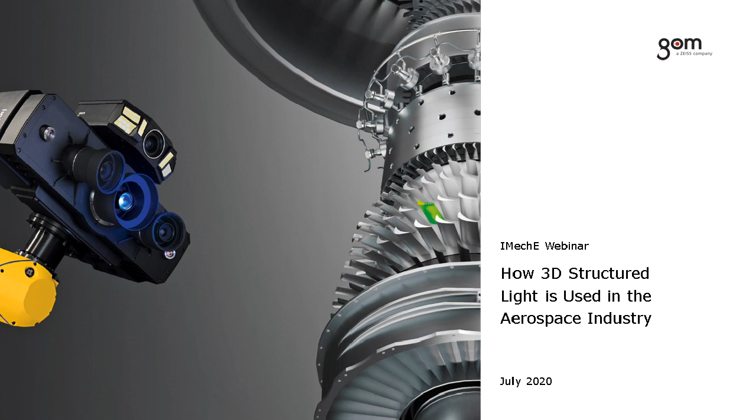So today I want to present to you how 3D structured light is used in the aerospace industry. So firstly, I'd like to introduce the presenters and also talk a little bit about who GOM are.

Okay. So, as an introduction, my name's Scott Cattell and I work for a company called GOM UK. So alongside working with GOM, I'm also a volunteer at the IMechE. So I'm education representative for the IMechE's Birmingham Young Members Panel. So my main duties include enthusing young engineers to be a part of the IMechE by helping out with events, hosting online and face-to-face sessions as well.

So just as a quick introduction to each of us, so on the left, that's myself. So I'm applications development and support at GOM UK. I've got over 5 years working in metrology, and 3 of which have been at GOM. Next is Lee Griffiths, who's a colleague of mine.

So although Lee operates out of the UK, Lee's actually a global role developing the business for aerospace and power generation. So Lee spent the majority of his career at Rolls-Royce, working on the metrology, but also developing as an apprentice with the aerospace division. And then he's also been working at GOM for the same amount of time as myself.

And then on the right as well are a customer of GOM's, but they're actually a service provider. So they complete bureau work. So this is Dan Laitchbury, and he's engineering manager for Physical Digital. So Dan's also very experienced within metrology. He's a chartered engineer with the Institute of Measurement Control, and he's spent the majority of his working metrology career at Physical Digital.

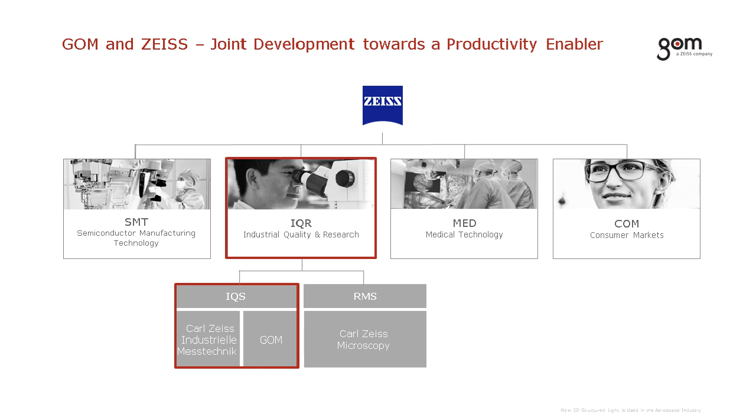So recently, roughly between a year and 18 months ago, we were acquired by Zeiss. So we've actually become part of the Zeiss group now, and from that we've become part of the industrial quality and research sector. So Zeiss are a humongous company, so they're most well known for producing camera lenses, so just general photography lenses, also the lenses in optical glasses as well.

So we've now actually combined portfolios with Zeiss. So this is basically to meet the demand of customer requirements. So within that, we've now got tactile, CT, and form and surface alongside dimensional metrology as well.

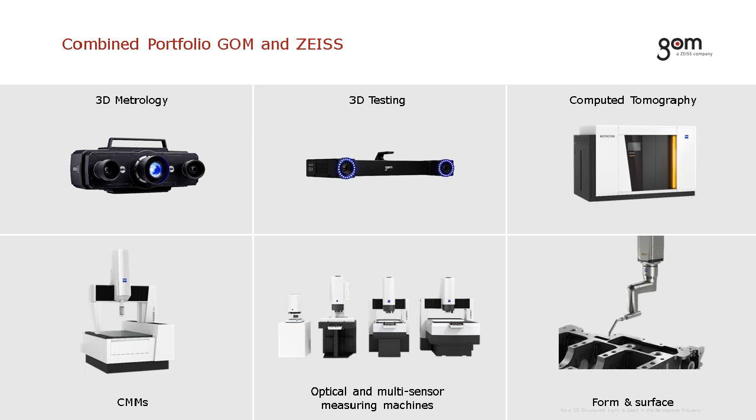So within GOM, I'm going to primarily focus today on the aerospace industry, but GOM as a company provides systems into many other sectors as well. So some of these include automotive industry, which is very large in Europe and Asia, consumer goods, which is predominantly in Asia, and then research in universities as well.

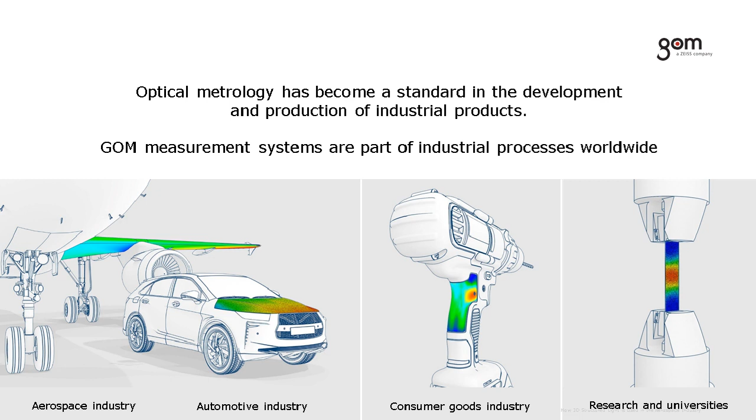So this is the other side of the business that we've got that tests materials. So we're always tracking 3D deformation, and this is what the research and universities are particularly interested in. Okay, so now we're going to actually talk a little bit about the technology and how it works.

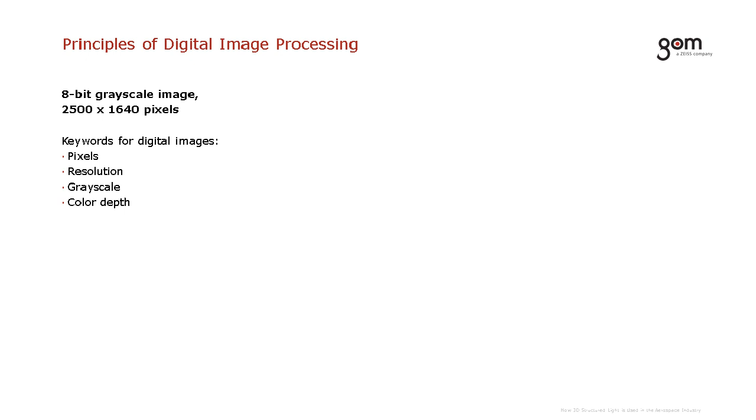Some of the keywords that we'll be talking about are on the screen now. So this is pixels, resolution, grayscale that we've just come into, and also color depth as well. So pixels may be fairly well known to some of you, but for others may be a slightly new topic. So we'll just go over these in some detail now. Okay, so we take these images in grayscale, and then we've also got a certain amount of pixels, or this is the resolution. So how many pixels have we got in this image?

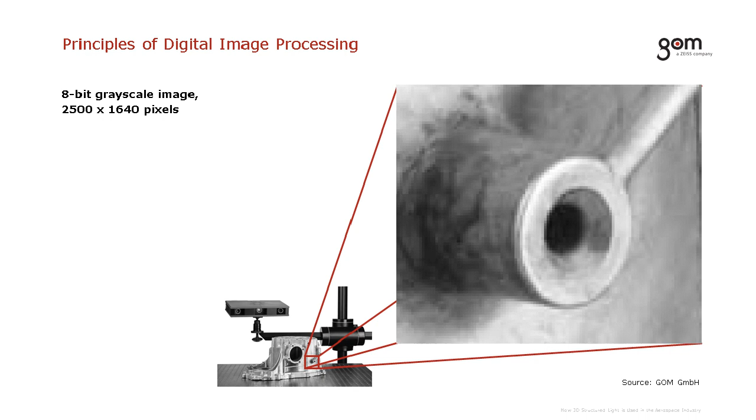So this is vital to actually extracting information from the part. So if we look at the blown up image here, we can actually see the individual pixels. A pixel is just a square. So images are made up of thousands, if not hundreds of thousands of these little pixels, and when we blow this up, you might be able to see that the blown up image on the right looks like it's consisting of a load of different squares. So when we go down to an even deeper level, what we've got are all these different squares in white and black and grey.

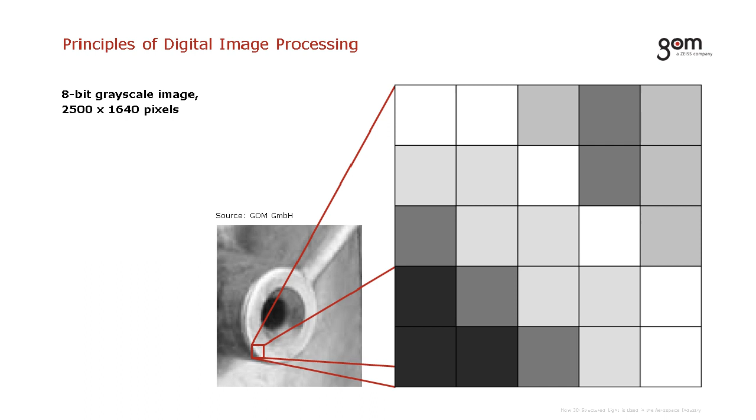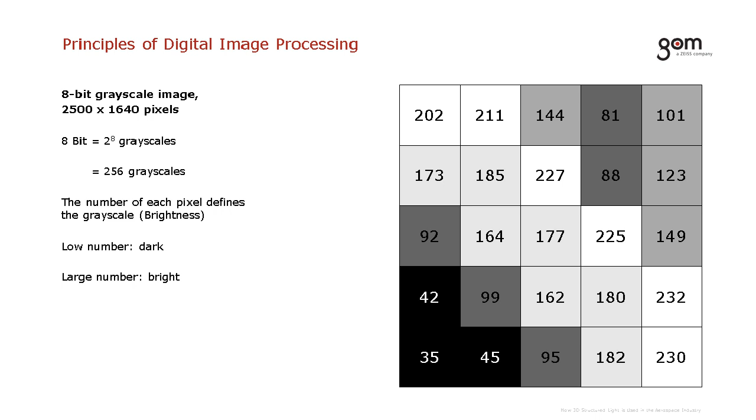So what do we do with this information when we first take the image? What we do here is actually assign numbers, 0 being the most dark and 255 being the most bright. So from this, we're able to understand where are the light areas and where are the dark areas. So why is this important to know? This is important primarily in our case to understand reference points.

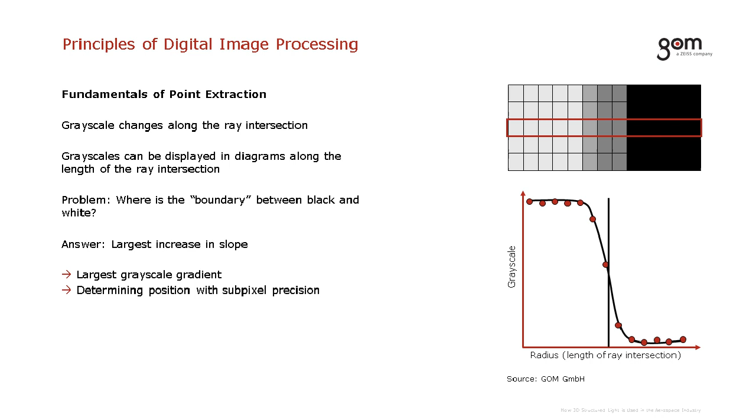Okay, so from this information here, we're able to then construct this over all these different rays. We can then form the ellipse, and from that, we then get the center point of that reference point. We do this with numerous amounts of reference points that are either on the part or on a fixture, and then from here we're able to triangulate the distances between the reference points, and then we can maneuver the sensor around it, and providing that we can see the reference points, we always know to a very, very accurate degree as to where we are in 3D space.

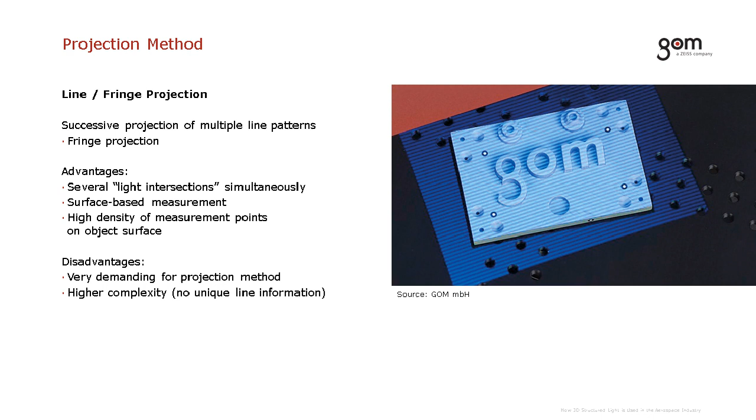So once we know where we are in 3D space, the next challenge is to actually scan the part. So how we do this is we shoot 3D structured light or a fringe projection onto the part. So this is where we differ. So there's two types of 3D scanners. We've got laser based, which will shoot lasers, and then we've also got 3D structured light. So structured light is actually shooting a known fringe projection onto a part.

So if we were to shoot this onto a flat surface, we would know exactly where we expect to see those fringes, as you can see moving on the screen now. And then based on whatever geometry is put in front of it, when we understand that the fringes are distorted in some way, the two cameras can actually go and pick up where the phase pattern is distorted, and then we're able to generate scan information from that.

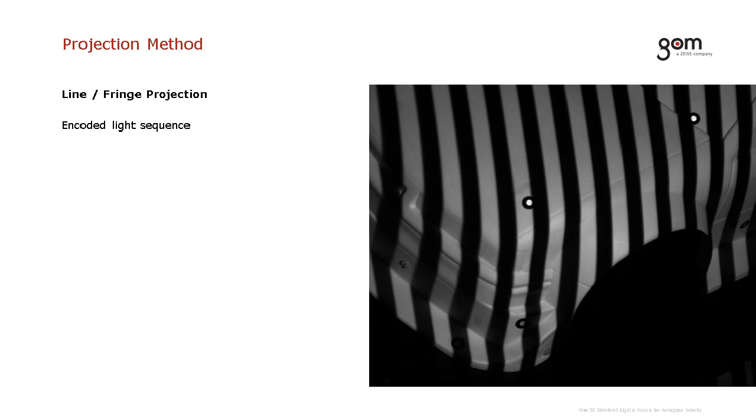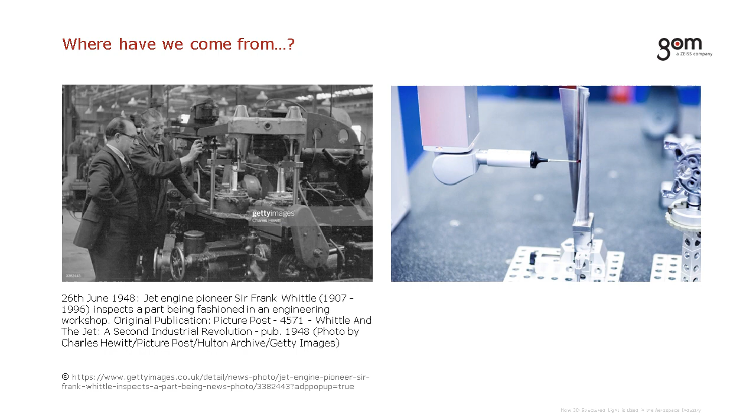And over the years, this has developed somewhat to be in more automated, coordinate-based techniques, much like you see on the right. So this is like a tactile method for identifying where the products are in 3D space, building this together and creating an inspection. What we found with the advent of CAD CAM systems, the more complexity that is being built into design, particularly freeform surfaces, things like additive, where really you're only limited by your imagination in terms of the design, is the need for a metrology system to support this, and that becomes the advent of a scanning system like our ATOS systems, which you see in front of you on the screen.

So this looping video shows one of our scanners, the black unit on the top, projecting the blue light as Scott's just described, being operated by a robot. So this is, let's say, equivalent to what you would do for a CMM. This is our level of automation. So the ATOS systems are some 20 years or more now in development, and we have quite a specialist team within GOM that do focus on aerospace. And building on the success of our previous generation sensors, we've launched a dedicated sensor for this industry. We've even named it appropriately, the ATOS 5 for airfoil.

So this is what you saw in the previous video. It's what you see on screen. And it's been designed and built specifically for this industry. We've optimized the setup, the lenses, the angles to suit geometries like turbine blades, nozzle guide vanes, blisks, and fan blades. So we've put all of our experience in over the years in order to meet the needs of the industry. So the needs are the resolution. So as the geometries get more challenging, the characteristics like edge sizes are getting smaller and smaller. The need to be quicker is also a big demand and a big challenge for the industry.

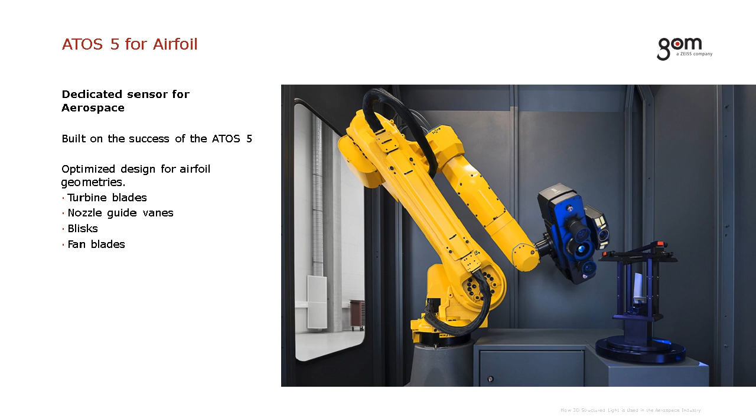So in terms of the capability, let's say, of this particular setup, you could measure something like an edge size of around 60 microns, and from a metrology point of view, use around 20 points to create that radius. Okay, in metrology terms, that's pretty good. So these are the reasons that the industry is moving more towards structured light. The data acquisition, the speed by which we gather data and we can measure and we can inspect is often extremely quick. And compared with traditional techniques, whether this is manual gauging or coordinate-based systems, these can be around half of the original time.

The other detail is really we're not limited by sectional data, which is quite a traditional way of inspecting. So sections are essentially taking a slice or a line through the part. You've essentially got a digital twin. It's a 3D replica in the virtual world of the product that you are measuring. So this gives no end of advantages that Daniel from Physical Digital will touch on in a second.

So these are the primary reasons that we use this technology, why we see it being taken more by the industry, because it becomes a tool that really starts to enable productivity, efficiency, and really moves towards this Industry 4.0 mentality.

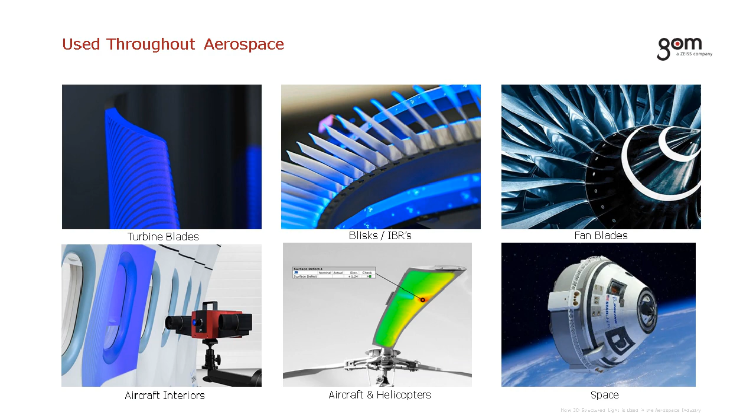Yes, thank you, Lee. Thank you, Scott, for the introduction. So, hello, my name is Daniel Aintreby. I work for Physical Digital. We're based in Guildford. I've worked with the GOM systems and other metrology systems for around about 9 years now, and we're actually the largest service provider in the UK offering GOM as a service, both operating mobile manual systems, and we also have a fully automated inspection cell with an ATOS 16 megapixel sensor.

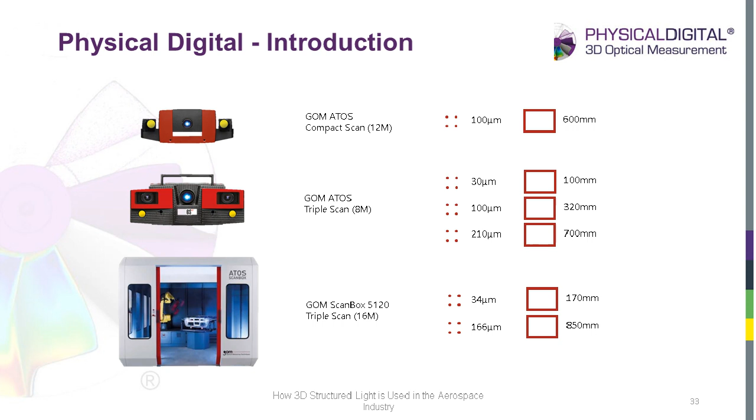We were the first company in the world last year to gain an accreditation called NADCAP AC7130, which enables us to carry out inspection of aerospace parts in the same way as a traditional CMM. We've also recently gone through an acquisition by a company called Trescal, who are one of the world's largest calibration companies. And I think this, coupled with the purchase of GOM by Zeiss, is a clear indication that the aerospace industry is going towards investing into optical scanning systems.

So I want to talk about a few applications that we've been involved in over the years. And first of all, kind of the range that you can get out of a GOM 3D scanner. So typical applications would range from 5 to 30 meters, we'd classify as a large object. And this can include full aircraft scanning for digital archiving, inspection, or reverse engineering of parts or full aircraft for CFD models or modifications.

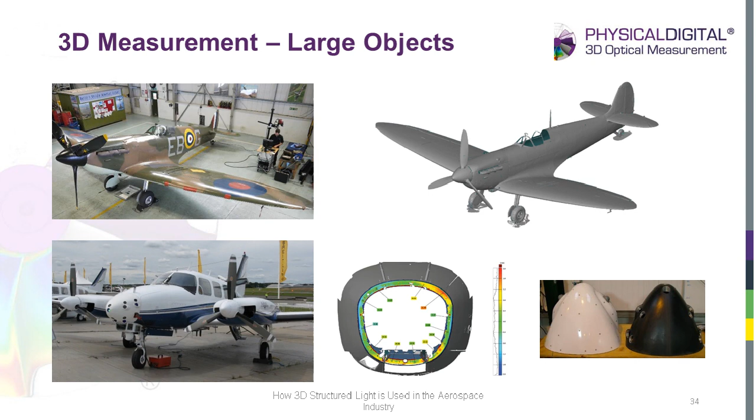And the reason the GOM system is particularly good for large objects is we have the ability to use it with the integrated photogrammetry system, which gives us a comparable global accuracy to a laser tracker network, but with the addition of having a huge number more reference points, either to take measurements to or to use for aligning scan data when used in combination with the 3D scanning system.

So we also do medium-sized objects that we would categorise between 1 and 5 meters, and this may include a rotor. So this particular example here is a 12-stage rotor that had over 800 blades, and these are all measured on a manual system. All shaft diameters were captured, and this took around about 6 hours. So you can see you can capture a huge amount of data, even using a manual system, in a very short time.

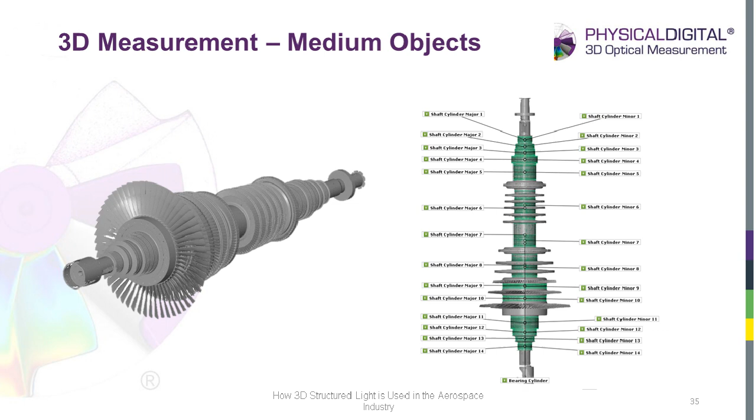But we don't just measure large and medium, and actually a lot of the real value can be seen in the small object size. So this is where we come on to the turbine blades and things. So I didn't want to show a trailing edge with no context or talk about resolution in microns. I wanted to give an example that everybody could relate to. So this is a fingerprint in a piece of clay that's scanned using a GOM system. And you can really appreciate the level of detail that you can capture in defining that surface fully.

So if anyone works on CMMs, I challenge you to get anywhere near that and calculate a time to measure that. The other thing is this is actually scanned on a system at 100 millimeters. The resolution can be increased by 3 times this if you get a specific system, especially for small parts.

So as Lee's already discussed, we obviously measure a range of parts, so typically blisks, discs, nozzles and blades, and the blisk would typically take around 2 hours to measure, full surface geometry, aerofoils and machine surfaces. Discs around 1 hour and 12 minutes, vanes around about 17 minutes, and then blades down to 7 minutes.

So I think the one thing to notice here, these are kind of average times, and also they are based on the system that we currently have set up. But since the release of the new Atos 5 sensor, these times would probably be halved. So it really does offer a production solution for measurement.

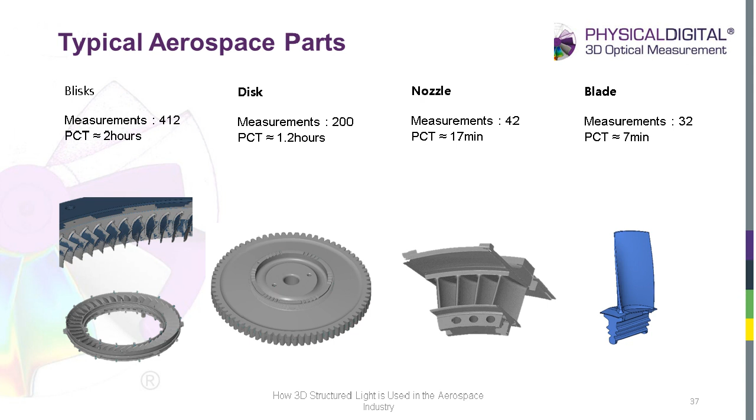So being a service provider, our measurement and inspection will fall into 2 main categories really. So we do low volume and high volume. The first being low volume, so this could be 1 part to 100, but tends to be one-off projects to help customers with measurement capacity or specific investigation to get areas that weren't necessarily captured on a standard CMM program.

So the advantage of the reference points, and again Scott has touched on this, is it enables us to have a direct link of traceability back to world standards because the scale bars can go and be calibrated in a DAkkS accredited lab. The photogrammetry system then is also used to cross-check calibration between the sensor, so from a process safety point of view, and also monitoring of environmental conditions such as lighting change. So it really does give a really stable system when used in combination with the scanner.

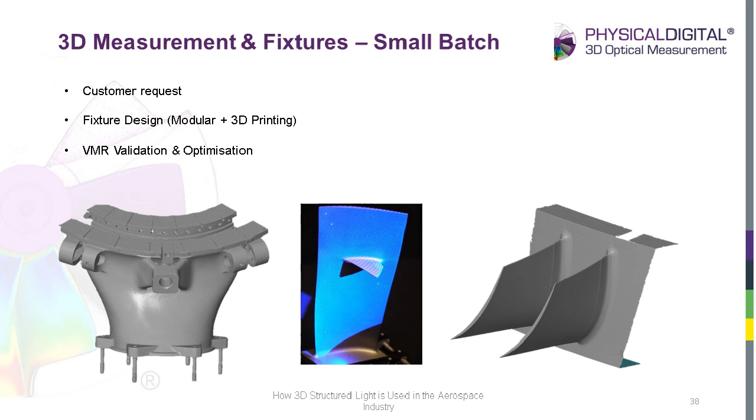The other advantage that we have from a small batch point of view is we have access to a virtual measuring room. So we're able to actually create all the measuring positions offline and have a digital twin of the robot before parts even arrive on site. So it's really a powerful tool for doing small projects and quick turnarounds. And then for these kind of projects, we would carry out some level of measurement system analysis, typically driven by the customer.

So the beauty of scanning is also we can capture the full surface of the object. And the image here on the top right just shows the range that we could typically achieve on a repeat study of a nozzle. So we're looking at around about 1 to 4 microns if we carry out a 10 dynamic repeatability study with reference points onto the part.

This project, from initial delivery from purchase order and customer parts to fixture design and manufacture, to create the programs, carry out the repeatability study and actually measure 30 customer parts, the total project length was 2 days. So you can see it's a really powerful tool for carrying out inspection work in a short time frame.

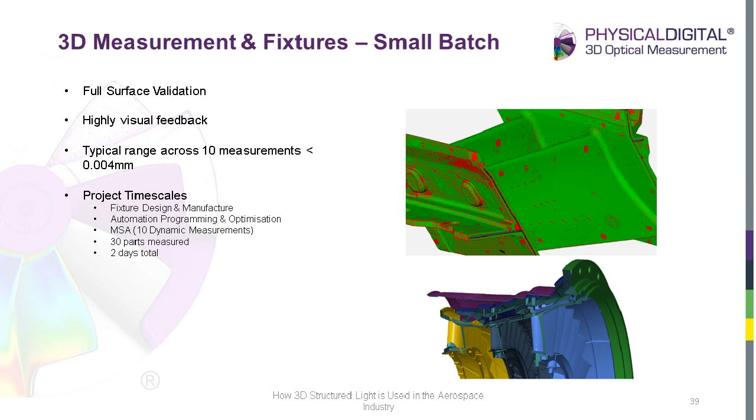On the color map, you can see there's red areas on the vane. So I just thought I'd point out here, these are actually the areas that exist under the reference points when they're applied to the surface. And obviously in production, it's not ideal to have to put points on, take them off, and risk having information under there that's incorrect. So that kind of leads us on to the second part of the measurement we complete, which is the higher batch sizes.

So where we're looking at sort of 100 plus parts, we would typically go down the route of optimizing the process to save time, and that may be with the specific one part fixturing, which you can see on the left and right, or if parts need scanning in batches or there is a large number, we can also create multi-part fixtures.

So the advantage of this is we obviously speed up the process of measurement. We have the ability to remove the reference points and place them externally to the object, so we're actually capturing the full surface, and to reuse photogrammetry measurements, so we're again saving time in the measurement cycle.

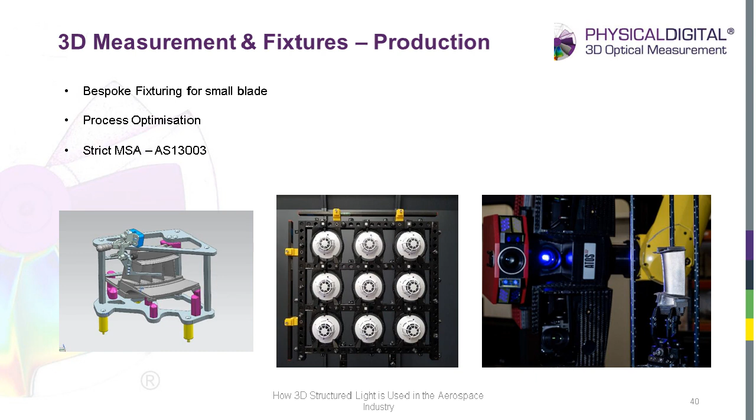So a typical example of a production measurement, so this is a single blade fixture. We would look at using a repeat photogrammetry, and then we can kind of put the time down for a small compressor blade for around about 2 minutes with a 10 times dynamic repeatability study of around about 3 microns. So compared to CMM, again, it depends what you're inspecting, but we're looking sort of 50 to 80% faster, plus the advantage of full surface deviation.

You can have the added benefit of full first article on every part if you wish. And then also the retrospective inspection of areas that weren't necessarily included in the original requirements. So no product recalls, no resetting up on the CMM to get that information. It already exists within the projects that you've captured.

So once you've captured all this great 3D data, what can you do with it? So first of all, we're looking at inspection. So we, as a company, have no direct affiliation to GOM, and we review competition in both hardware and software. But the reason we feel that GOM is so powerful is for a number of reasons. So we've got the ability to maintain full traceability from measurement to results.

So that goes from the calibration of the sensor, the artifacts, the scale bars back to world standards, the fully parametric link between the measurements and the results, which obviously is fundamental for aerospace, and just keeping that unbroken chain of custody, which you can't get if you then start extracting measurement data out of a capture program, importing it into a separate inspection program. You've lost that kind of direct parametric traceability.

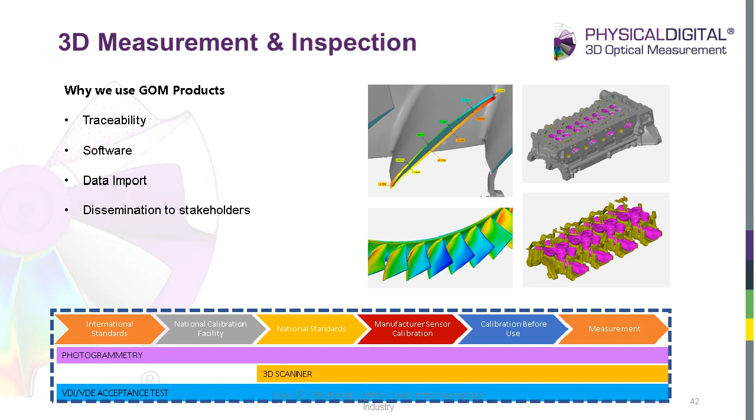So along with providing measurement and inspection, we also carry out a vast amount of reverse engineering. So I wanted to touch on a few tools where 3D data and the GOM software really help with the process of doing that. So to start with, I just want to quickly differentiate between two types of reverse engineering and where we differ, and where the aerospace industry differs as well.

So firstly, the example you see on the screen. So we've got a 3D scan of the part. We create a really nice CAD model. We show a color map deviation that's showing almost zero deviation. Maybe create some drawings, maybe create some model, maybe manufacture the part. So this is probably acceptable in some applications and looks great for marketing, but actually there's a few underlying questions that everyone should be asking if you see this or you're looking at doing reverse engineering.

So, is the part that was measured first correct? Obviously not, because it's been manufactured and it'll have some inbuilt variation. What's the history of the part? What about the interfacing parts? How is it manufactured? What's the measurement system accuracy and uncertainties? Has the CAD model been produced how the designer originally intended?

So there's a huge amount of questions that actually go into the background, and really creating a copy of what you've scanned is not truly reverse engineering in most instances. And if you don't see any deviations on the color map, then you probably should be asking questions about why not.

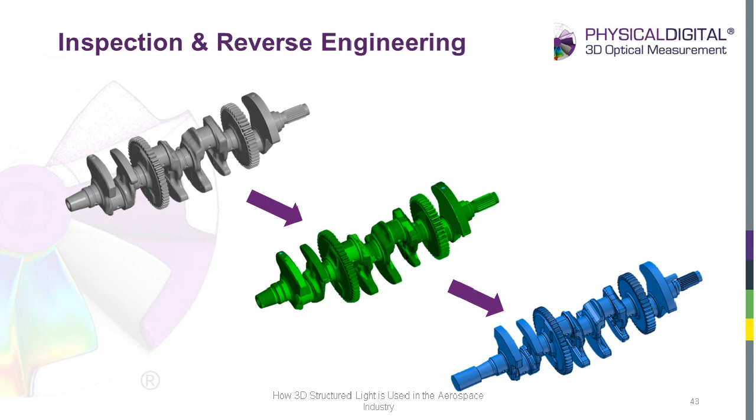So if you compare that to a CMM, if you're capturing 3 points or 10 or 20 or 50, yes, these are phenomenally accurate and probably sub-micron in a lot of applications, but is this better, and does it characterize the surface in the way that you actually want it? It also has major implications on functional requirements. So if you're applying maximum material conditions, how do you actually apply them if you're not capturing the maximum and minimum?

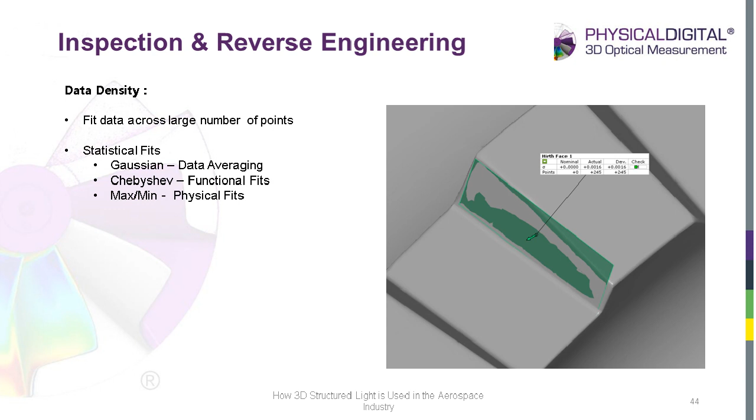So with the 3D scanning, obviously you're capturing a lot more data and characterizing the surface as best you can. So even at this feature level on a simple plane, the data gives a really good level of control because you can change the fits and you can take data out if it's deemed to be a piece of dust or dirt, and you can do that all retrospectively without having to remeasure the part, which other methods don't allow. So coming to the next slide.

So the other important thing, as well as data density, is looking at sample size. So this, I'd say, is the single most important aspect of precision reverse engineering. So when we undertake a project, we liaise with the customer to understand the level of risk acceptable in not correctly defining the geometry. So every part is going to have some manufacturing variability. What sample size do we need to capture to ensure that we've understood that variability, or at least minimize the risk as much as possible?

And this is where the batch or trend analysis comes in GOM. So it gives us the ability to carry out parametric inspection across a large number of the same parts in a fully traceable way, and also generate the sample statistics and identify potential outliers and anomalies. And also, if enough is known about the part, material, and manufacturing, we can also reverse engineer tolerances as well by using statistics and capability metrics to understand what's going on in that manufacturing process.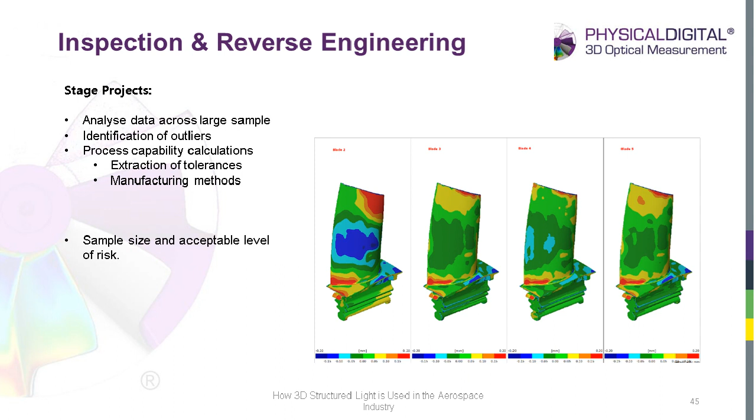All right. Sorry, I've skipped a slide there, apologies.

And then finally, from the tools within the software point of view, we have the aerofoil analysis, which Leah's touched upon. So a lot of the projects we undertake involve some reference to an aerofoil. And using the tools within the GOM software, which are standardized to aerospace companies, provides the key information for reverse engineering as well. So both 2D and 3D information can be generated and analyzed. And then from these, we can create driving dimensions for reverse engineering of models and parts.

GOM also provides the ability to have a golden mesh, which has a huge amount of uses. But in many applications, a good level of understanding of what that's actually showing you is required. It's not necessarily a tick box, an easy route to get the correct geometry out from a reverse engineering point of view.

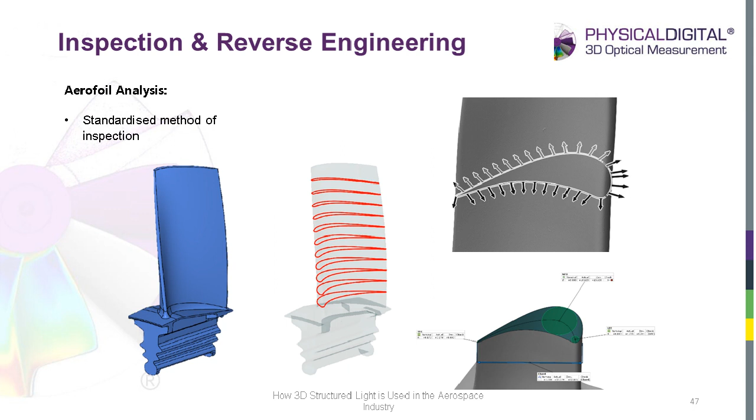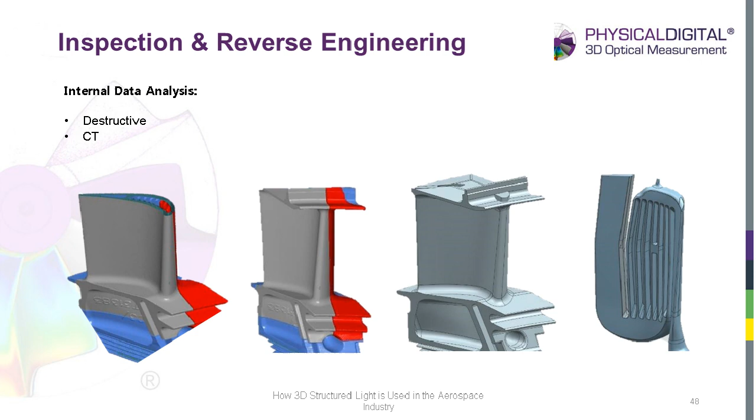And then some of the projects we undertake, we need to access internal data. So although GOM do now have a portfolio of CT scanners, it's still not usually suitable for measuring internals, especially on nickel-based alloys. So for this reason, destructive methods to extract the core geometry in this example are still used. So here we'd scan the outside of the blade. From that scan data, we'd create a fixture to hold the part while we carried out an EDM wire cutting process, and then the parts would be rescanned and realigned into the parent geometry to give us the core geometry in the same alignment as the external form.

So 3D, I want to just touch on some kind of developments and other things going forward now within the software and 3D scanning. So 3D CAD data and drawings should be unambiguous, but anyone who works in these on a daily basis will know that that's just not the case. So the designer, manufacturer, and inspector will all have slightly different interpretations of the design, dimensions, and tolerances, which will inevitably lead to variation in the part. And whether this is attributed to manufacture or inspection, it doesn't really matter. It's just this variation which is an issue.

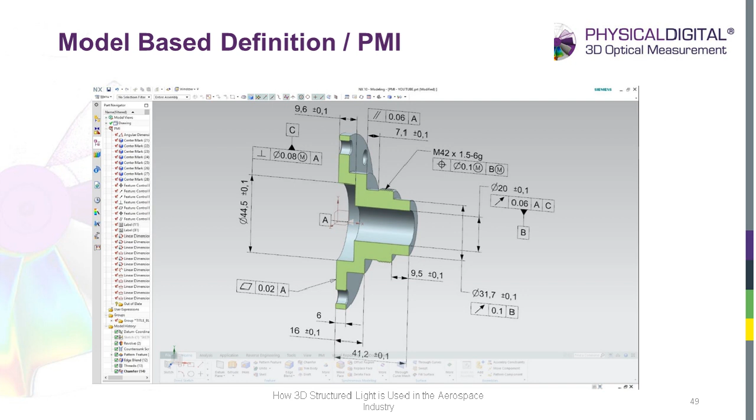So a development that goes some way in solving these problems is the use of product manufacturing information, or model-based definition, where we can directly attribute the dimensions and tolerances to the CAD data. So using the GOM software, this data can be read in directly and inspection plans created in an auto or semi-automated way, let's say. So this goes quite a long way in ensuring nominal values are correct and tolerances are correct, but actually is only half the story. So I think there's still a little way to go before there's a very easy way to translate measurement data in CAD into measurement data in the real world.

So if we take a really simple example here, like a linear dimension between two faces, there's at least 11 different ways to measure this, none of which are ever stated on a drawing and are always open to interpretation. So how do we communicate this on a drawing, and how do we communicate this within the model-based definition?

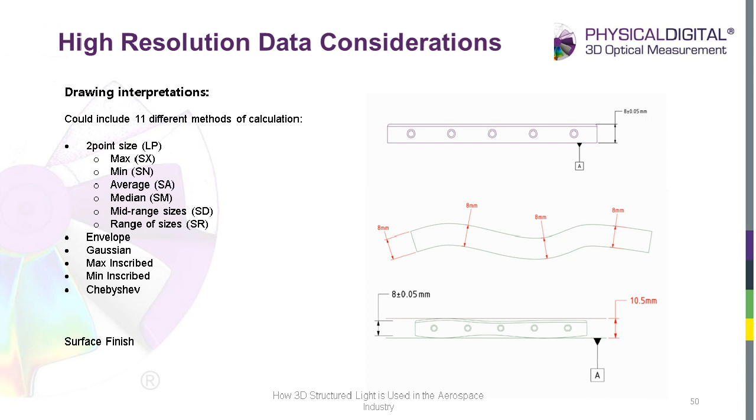The other thing to consider is the fact we have this high data density. So because the probability of detecting a true maximum or close to true maximum is more likely, then we tend to end up with results that maybe don't correlate with other systems, but are usually the upper end of tolerances, or often push parts out of tolerances compared to other systems.

So the ISO 14405 is making some progress. So you can see at the bottom right, we're looking at having some sort of statistical based measurements to kind of alleviate a bit of this. So if you see the image at the top, there's clearly some dust and dirt, which is factored into the calculations currently, but actually is probably not a consistent or correct way of doing it. So it's developing, but it's just being aware that when you're correlating between systems, you have to compare like for like, and there is variation that exists between these.

And then finally, for myself, it's just looking at what potential could happen in the future. From an aero engine point of view, because the speed of capture is so fast, is there potential for scanning everything and then using live CFD models to actually kit parts, so we're getting optimum performance of every part, or at least modules, which isn't unforeseeable. And also looking at full airframes.

So as the sensors and technology advance, is it possible to scan them during manufacture and deliver, for instance, customer-based delivery models, or during the MRO process, looking at dent and buckle reports in an automated way, or repair verifications, or even every time it lands. Who knows? If the scanning technology is developing as fast as it is, then it may even be feasible to scan every aircraft at certain hubs and have a complete history of the airframe movement over time, looking at deformation or hard landings or bird strikes. So these are a few possibilities and examples, but I'm sure the industry will find its own way.

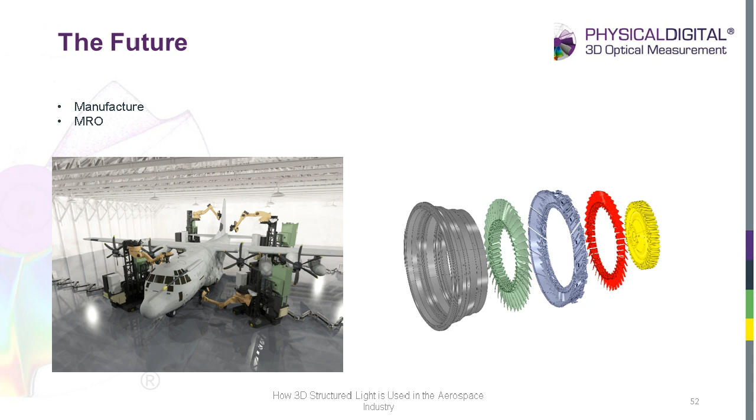Really appreciate that. It's a great overview of some of the real and practical examples, from reverse engineering through to production measurement and so on.

Thanks very much. So, the topic of standards. It's an extremely highly regulated industry, the aerospace industry, perhaps as regulated as any out there, and there are various standards and accreditations to meet, and I've seen a few items on the chat that relate to these questions. So first and foremost, like any measurement system, our systems leave the factory with a certificate. This is in line with VDI/VDE standards, and also now we have the 10360-8 as a test that you can do on our automated systems.

But what I really wanted to address, I get asked this so many times as I visit potential customers, is: can we use 3D scanning for final inspection?

Are companies using it for final inspection? Well, yes, there's nothing out there that prohibits the use of this. And it's quite often a common misunderstanding of the technology. So what I wanted to do is just give you a couple of examples about how we fit with the most common standards. And the most relevant, I guess, in the first instance is AS9102.

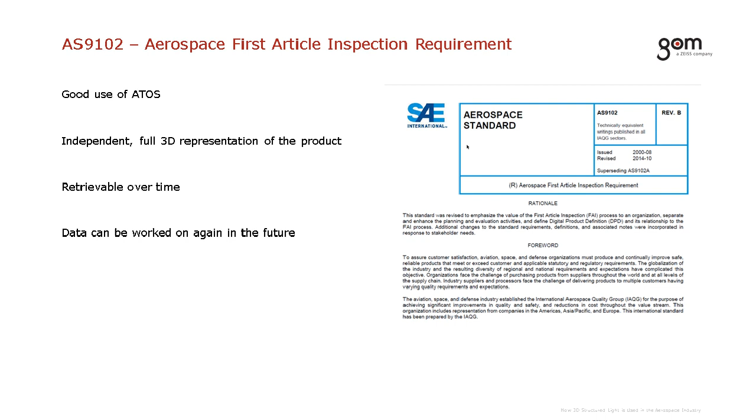And you can always go back to this data, reevaluate it in the future if there's something that you need to do. Those that are from the industry like me will have had no end of experiences of trying to get something remeasured by a CMM, for example, because there were not points taken at the time of the first article. So once you've got the 3D data, as Dan has highlighted, it really is possible to do whatever you do.

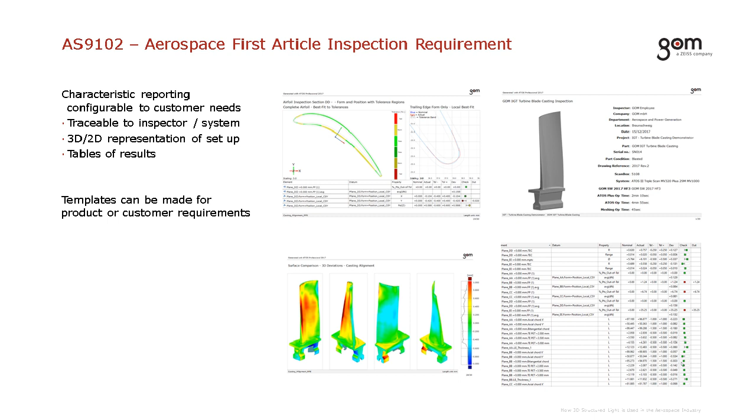First and foremost, obviously, you have to meet the requirements of the design definition. This is normally an inspection report, perhaps based on sections, as you can see, title pages, who did the work, name of the products, tables of the results, different alignments. You can see in those color plots different alignments you can form, local best fits. Really, the possibilities are endless, and these can be made into templates, so this can be repeated, it can meet company standards or customer requirements perhaps. So yeah, like I say, it's a really good use of the technology.

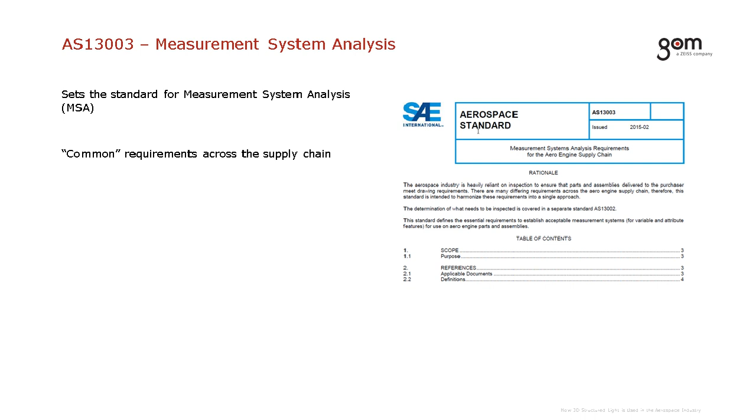Also, actually, a couple of questions on the chat around validation or measurement system analysis. So good to bring out how we fit with AS13003. This is quite a de facto standard now for the aerospace industry. It's quite common; we see it across the supply chain. If it's not this standard, normally it's something very similar, but essentially this is measurement system analysis, sometimes called gauge R&R. And quite simply, we can be evaluated in the same way that you would evaluate something like a CMM.

So in the language used within AS13003, we would be called a computer-driven measurement system. And the test there is a 10 times repeatability study. So measuring the one part 10 times and looking at the variation within that measurement. At the same time, there is a correlation activity. So this is a check to an independent setup, perhaps in this case a CMM or another form of measurement, and doing a correlation check.

So the first step for us in this process is to evaluate our repeatability study in 3D. What you see from the image on the left there, you see the numbers 1, 2, 3, 4 through to 10. This is each of the individual measurements carried out as part of our measurement system analysis. And the color in this case represents the range of the results. Okay, so this is, say, the furthest away from one of the other measurements, the complete range that you're looking at there.

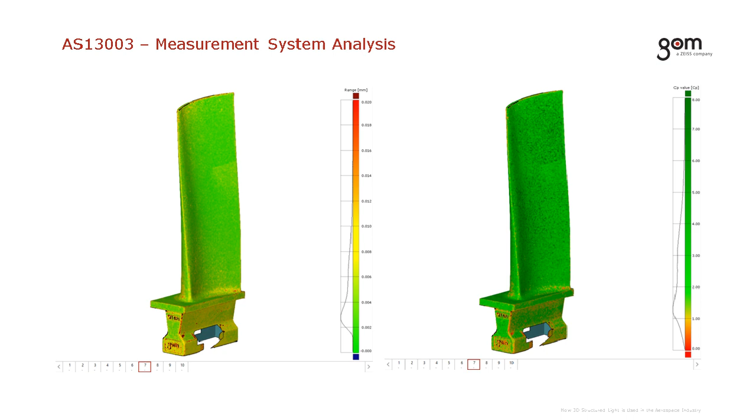You know, if you're doing something via a tactile method, it's difficult sometimes to understand if it's a misprobe or if it's hit the peak of the radius or something like that. This is a real visual way of doing that. So it gives you confidence when moving to the next step. And the next step, very traditionally in this type of study, is to evaluate based on the characteristics of the drawing.

So this table is from the software. It shows points, thicknesses, diameters, radii, and it shows each of the individual deviations from that study. So this time we've aligned it, we've measured to drawing, and we've reported the deviations per measurement there. So this is each of the 10 repeats.

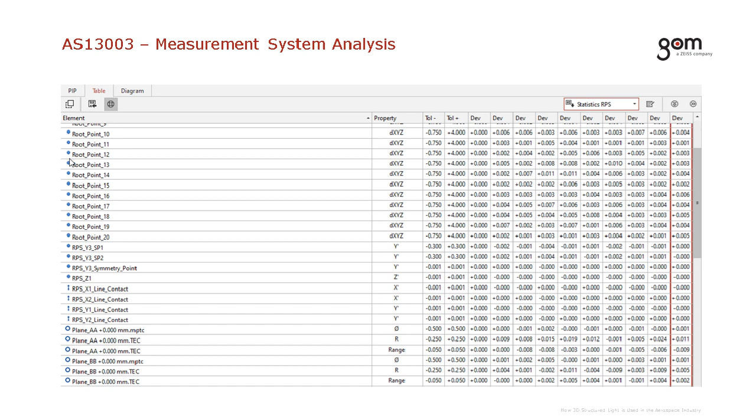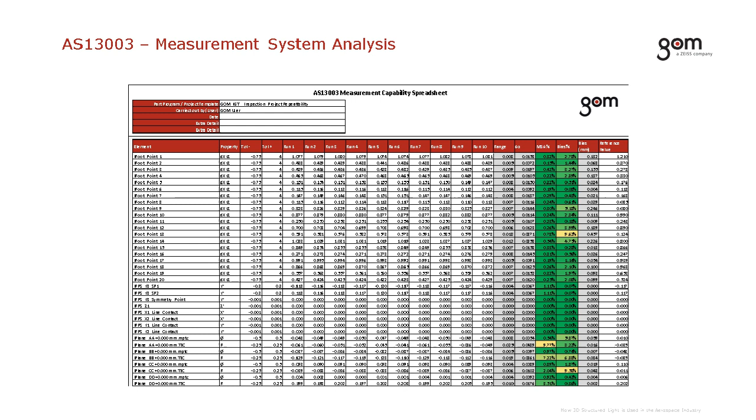And then there's various export techniques that perhaps have to fit with various company standards or something like this to tabulate the results, also to add the correlation result from an independent system and present the result of a measurement system analysis. So, you know, likening 3D technology very much to traditional 2D technologies, this is the way in which we would carry this out.

So many more standards exist, for sure. There's no way we could do any of that justice in a single WebEx like this. So we've just highlighted the two main ones. What we can say is that we're in a good position in terms of there's not been any sort of procedural or standards, either international or from a customer, that we've not been able to fulfill in some way.

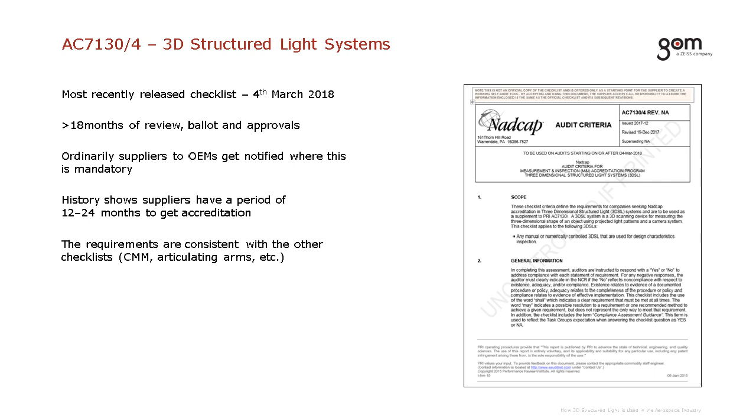And we're doing that. Me personally, I'm a member of the NADCAP committee that looks at the measurement and inspection standards. And as Dan alluded to, this is one way in which the industry has moved quite recently to standardize how this type of technology is looked at, is evaluated, and even audited to ensure best practices are followed, that good metrology is the outcome. And this is standardized and agreed by the committee, which is made up of aerospace prime companies and the supply chain companies as well. Perhaps some of you on the WebEx are members too.

Quite simply, this is, sorry, gone too far, too quick. This is a 2-day, very careful audit of the production use of a system like this. It goes through a very comprehensive checklist with a trained auditor that evaluates the use of a system like our ATOS systems. In the end, you get a certificate to say that you have achieved the accreditation. From my own point of view, it is a high accreditation standard, but also it's very consistent with what is already out there in way of auditing criteria.

We have the hardware and the software controls in place to satisfy the requirements, and accreditation is possible, as Daniel and the team have proved, as well as others now out there for this accreditation. We're ready, we're prepared for this, and we've even published a white paper document on our website which helps people to understand the nuances with the checklist and how to achieve this.

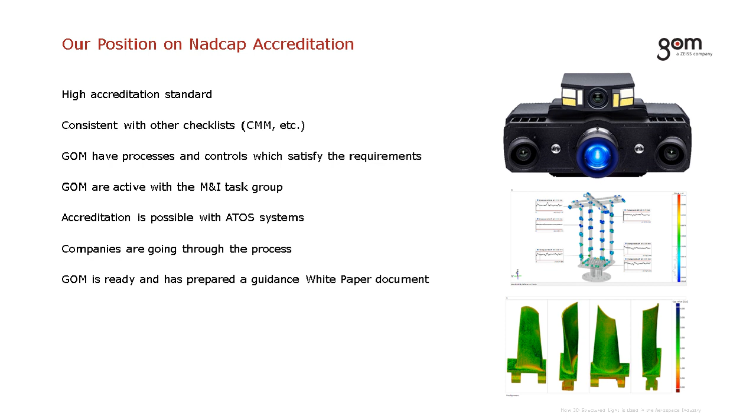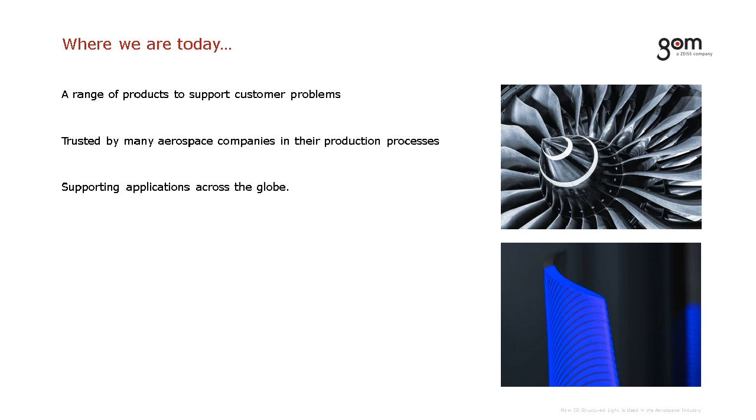So today, we've just touched on a real small element of this. We have a wide range of products to support the customer problems. Predominantly, that's where we've come from. But now very much we're trusted and in mainstream production applications doing final inspection measurement across the globe. And this is really where we are today. What's driving us, as Scott alluded to at the beginning, and also Daniel in his chat, we're really driven by the customer requirements, the customer demands, and this is really what pushes us forward.

So right now, we've gone from being used as a development tool to being mainstream production, and now companies are really challenged: what else can we do with that data? It's extremely high resolution, as you've perhaps seen from some of the information we've showed today. And what we're seeing actually is we're kind of crossing that grey area of non-destructive evaluation, like visual inspections and detecting imperfections on the surface, perhaps dents, nicks, scratches, and so on. And we're really at that resolution where we can start to really evaluate this and really standardize and streamline some of the existing more traditional processes for doing these checks as well.

So really driven by customer requirements, customer demands, which is the way in which we are going forward as a company. Okay, that's it for me now. I'm going to pass back to Scott, who will conclude.

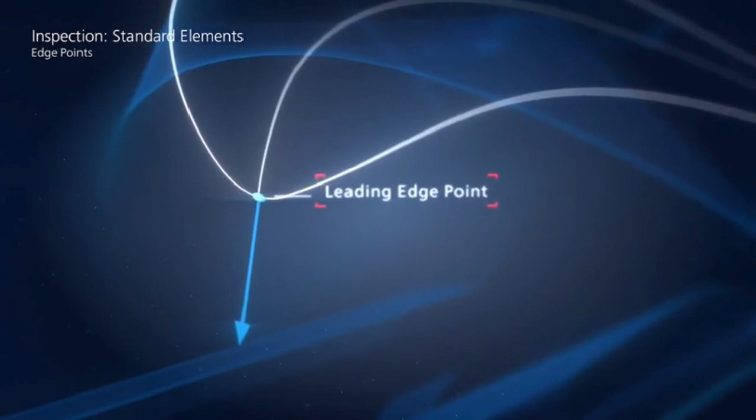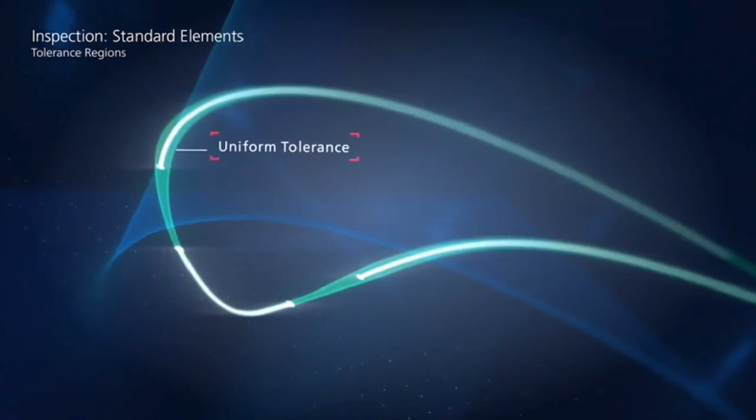Okay, so Zoe's asked, how hard would it be for someone from a chemical engineering background to join the industry? So with all types of engineering, of course, there's many areas of crossover. So what I'll answer firstly is the GOM and metrology area. With GOM, we completely start from scratch when we complete the training. There's a 5-day basic training course, or 3 days if you're not doing the automated. So this is absolutely possible to join with the fundamentals of engineering that I'm sure you embarked on with your studies. In terms of aerospace as well, aerospace is a very broad, large area, but I'm sure there'll be no problems trying to join the area from that.

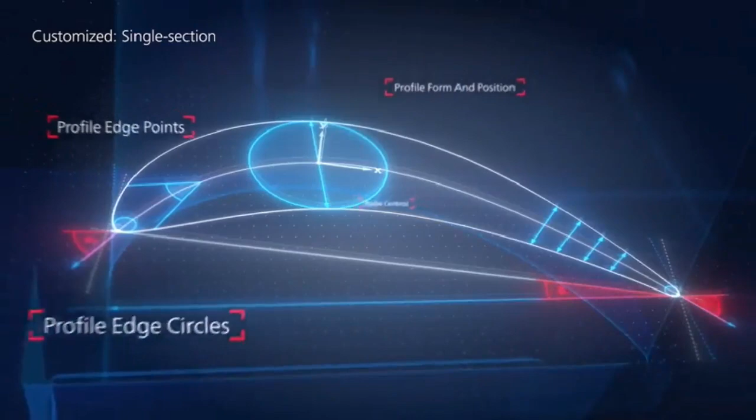Okay, so then we've got the next question as to how do you address measurement traceability? Yeah, shall I take that one? Yeah. So I think maybe we covered this in a little bit of detail in the presentation. But the sensors, the scanners, they come with a certificate. This is a test we do in line with the VDI/VDE standard 2634 Part 3, I believe.

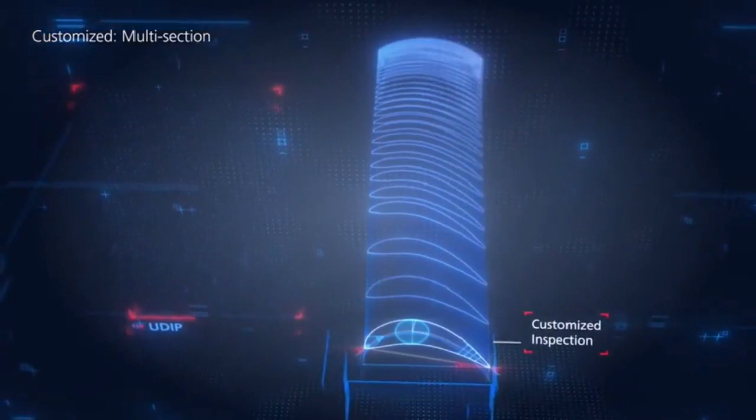Yeah, that's right. And for automated systems, it is now possible for some of our scan boxes to do an ISO 10360. There's a Part 8 there now that we can comply to, and as you'd expect, everything in the measurement chain, from the calibration panels to the scale bars, they all come with a traceable certificate as part of the system delivery. Okay.

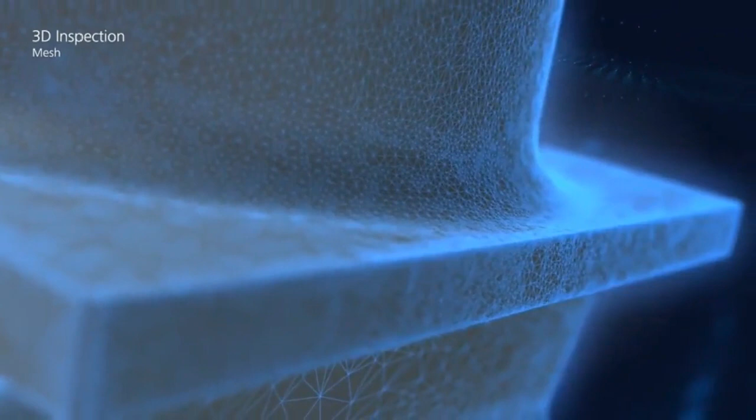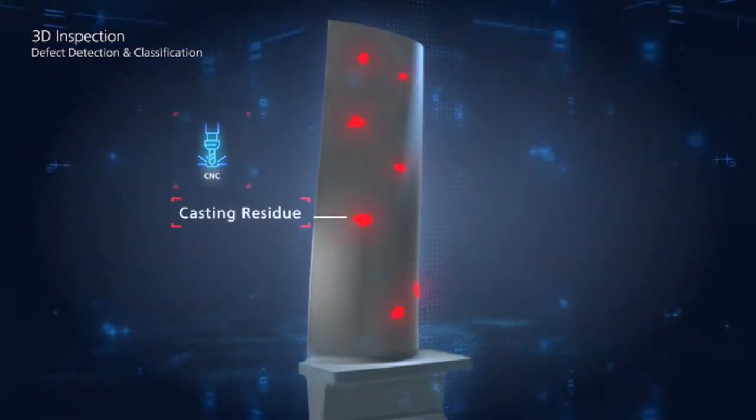So next question: when carrying out repeatability studies, does the system display consistency? So we've got a number of things within our software to aid the repeatability studies. It really depends on what the customer wants. Generally, what we do is create a colour map which would indicate what happens when we compare run 1 to run X, in which we can just look at what it was at the start of the process and how much we differ. We've also got things in our software that show the sigma value, the range value, and also CP, CPK, PP, and PPK values as well.

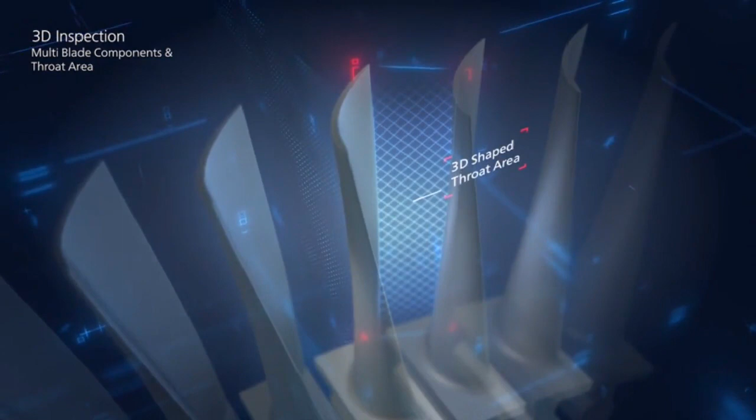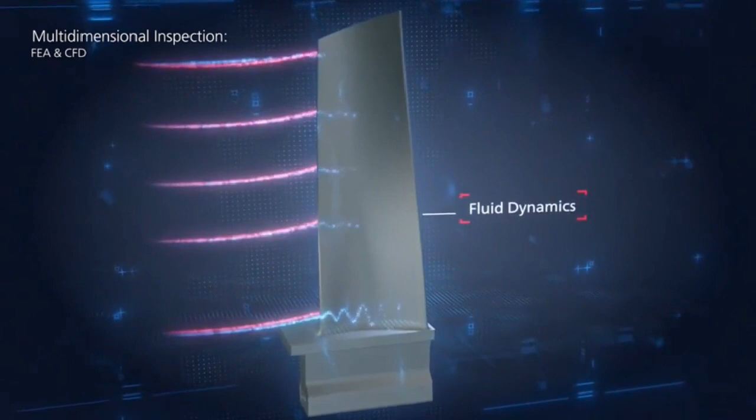Okay, the next one is, when you relate the measurements back to the scale bar, do they indicate consistency? And if so, do they indicate any detectable bias? So just as a quick introduction for those that aren't aware, the scale bars are what we use as a scale for the reference points when we're doing photogrammetry. So in short, the answer is yes, we do show a scale bar discrepancy. This is every time the photogrammetry is run. If we look inside the properties tab, this gives us our discrepancy inside there. Please get in touch with us if you want a bit of a demonstration on how that works.

Scott, what I would say on that fact is, if you take a blade measurement on a photogrammetry system, small volume, you're talking sub-micron if you've got a good fixture and setup. So yes, there is discrepancy, but it's down in the single micron level if it's set up correctly.

Okay, next question I'm going to hand over to Lee. Okay, question around QIF. So this is transferring of data like PMI and geometries. I think Dan covered this quite well. The functionality is there, which is developed if your CAD data import has had the application of this onto the geometry. It should import into GOM Inspect. This will be able to drive the sensor in automated techniques and also streamline your inspection processes. I would suggest if you've got it, then try it. And if it's not working to your needs, contact us and we will look to address this.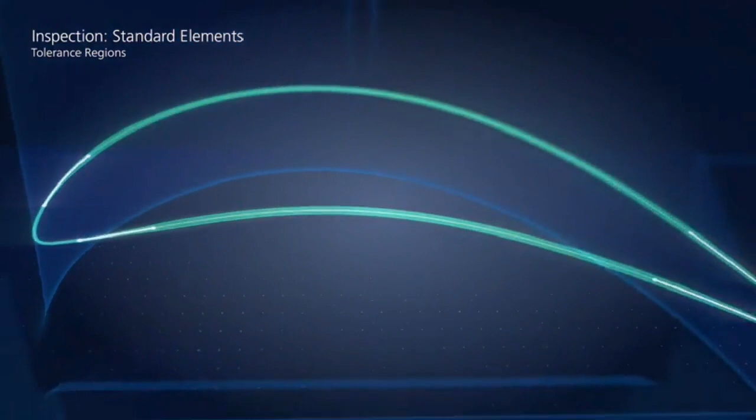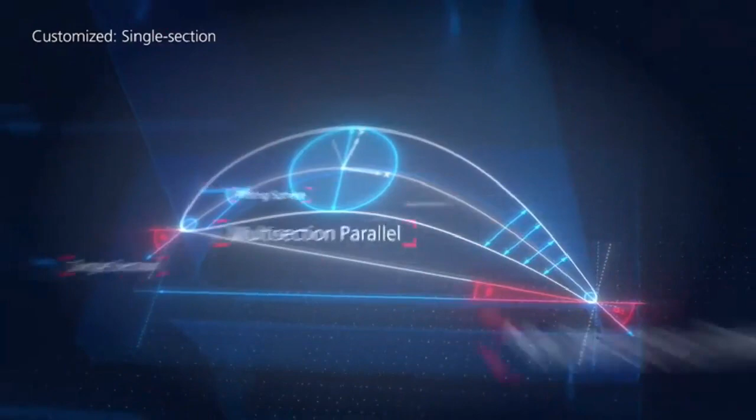So if we're talking here about operator error, generally what we'd say in this situation, if it's a vital part that we've got a repeatable process, the automated route is generally the preferred and suggested route from us. But generally, when we do individual scans, the sensor is constantly checking things like movement error, lighting error, or any influences that are going to produce bad data. So we've set some very tight thresholds to reduce the amount of operator error. We've also got many different prompts within our software that will allow that information to be portrayed, and we won't let any bad measurement data in.

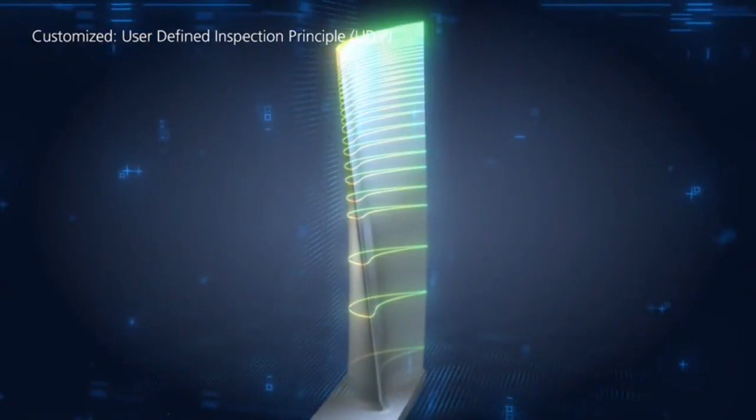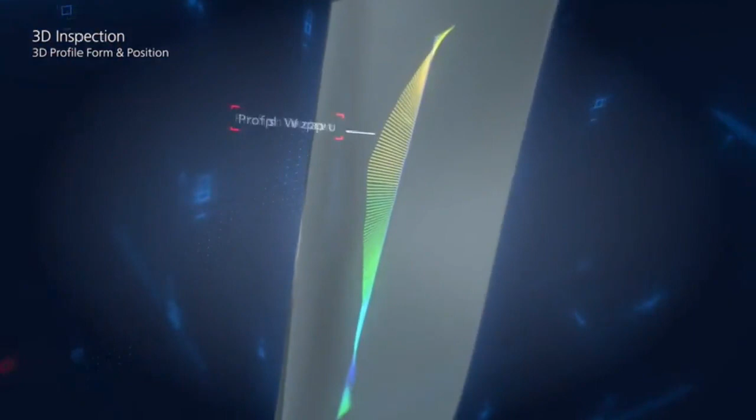Okay. Question around the software algorithms and the validation of these. Yeah, as many metrology softwares have to go through, there's standard protocols and testing that's carried out. We do this with the PTB in Germany and also the NIST tests, and the software therefore is certified.

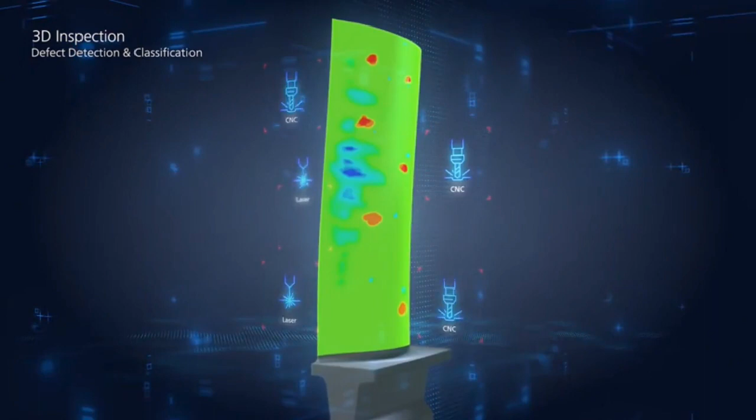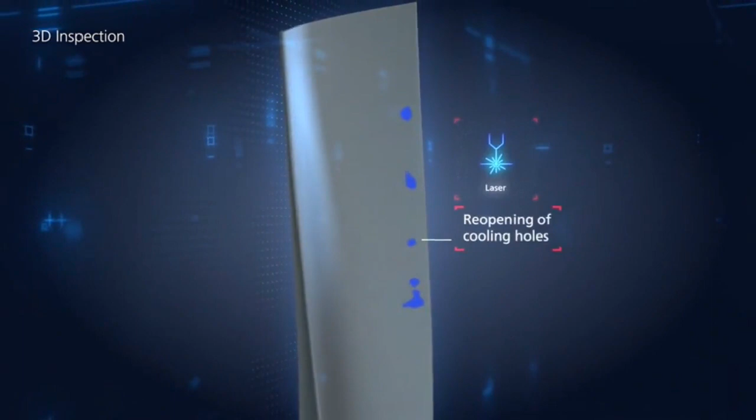In terms of MSA analysis and libraries of this, MSAs are pretty much mainstream in absolutely everything we do, whether it's a single demo or volume production. The MSA is something that we do. This is normally on customer data, so it's not something that we keep a library of. We do have some for demonstrator parts, and if it's a specific interest, I'd ask you to get in touch and we could perhaps talk you through something like this.

Bear with us, guys, we've got a lengthy one here.

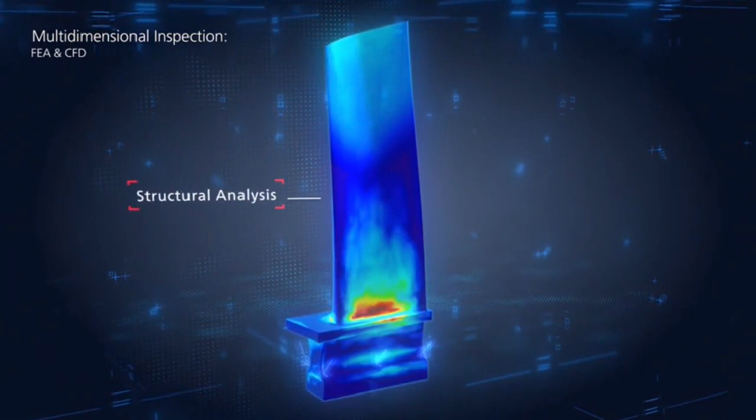Okay, so this question is around multiple sensor positioning and the size of the object. So Scott covered this at the beginning with the use of reference points. So it is possible to use a large measuring volume. This is something that we haven't touched upon. We're able to use different measuring volumes, which will give us a certain size of area that we can scan. So the larger the area in which we scan, the fewer points, or the less resolution we'll have in certain areas. So this question alludes to using a large measuring area on the majority of the surface and then a smaller one to capture the details.

So this is possible by the use of reference points. This is just taking into account where we are in 3D space, and if we use the same project, we constantly keep monitoring the triangulation between the reference points, so we're able to understand where we are in 3D space, which will allow us to stitch the image back to the correct place in 3D space accurately.

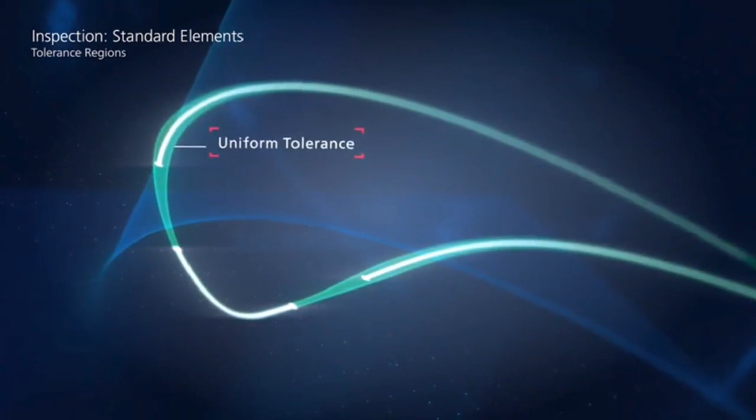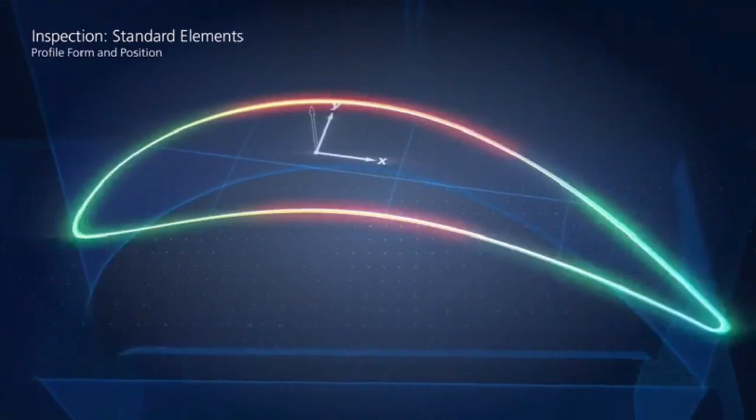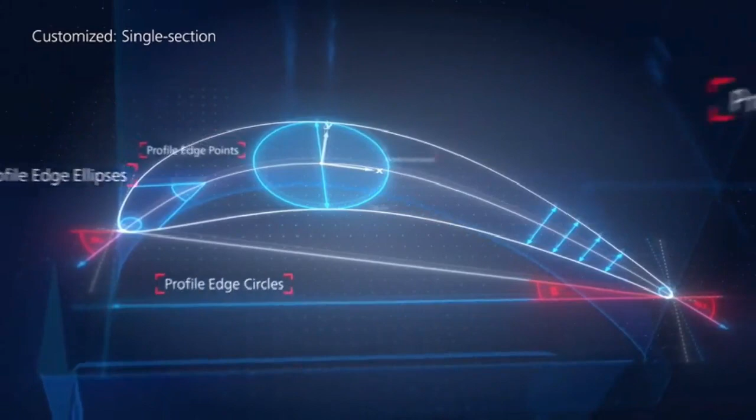Question again around validation of the data when it's received from the equipment to the software. This is handled by the software, so the data acquisition combined with the parts of the process, like the scale bars, like the calibration panel giving the size, and ultimately, this is a validation check that we would do as part of MSA studies and checking against known standards. Much like any metrology system, the ATOS systems would be used in the same way.